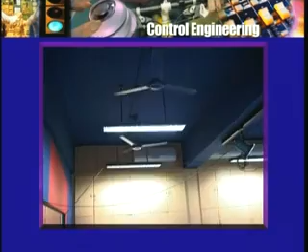If the incident light from the window is adequate, you may want the light off, but if it becomes cloudy, the light is not enough, and you will get up and turn the light on. Of course, one can have a much more sophisticated illumination system, as in a big lecture hall or theater, where it's not just one light to be turned on or off, but a large number of lights, some of which may have to be turned on depending on requirements. There is also provision for dimming of lights, gradually dimmed or made bright. This illumination control is a big area, but the simplest example is our ordinary light with a switch.

Of course, when you have lights that can be dimmed, the control is not simply on-off, and we'll see more of such things a little later. What else do you see in the room around you? Maybe above you, on the floor, or on the wall you see a fan—for example, the ceiling fan.

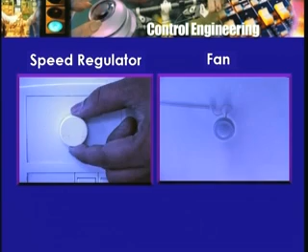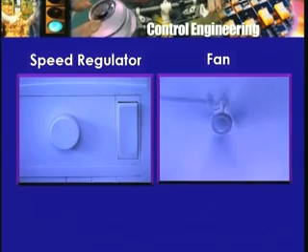Now that's also another control situation. If it's cool enough in the room, with fairly good breeze, you may not want the fan on, but if it gets hot, you will get up and turn the fan on. But there is something more possible with the fan usually—there is also an arrangement for controlling its speed, called the regulator, the fan regulator. Because you may not want the fan to run at only one particular speed, you may want to adjust the speed depending on conditions. Some people like to have the fan on at full speed; others, like me, are uncomfortable if the fan is on full speed. We like to run it at a low speed, just enough to produce some breeze and ventilation or circulation of air. So the fan has an on-off switch, of course—you are able to turn it on or off.

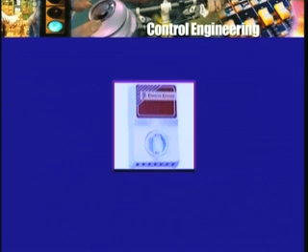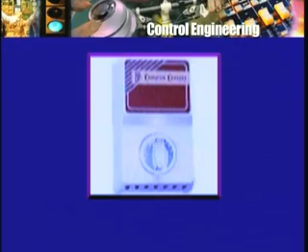Here the choice is not between just on and off, but between one of a number of levels or values. Such a set of values is said to be a discrete set. So this is an example of what could be called a discrete valued control situation. Here you choose not between just on and off, but between more than two possibilities, namely 0 speed, full speed, or speed in between 0 and full.

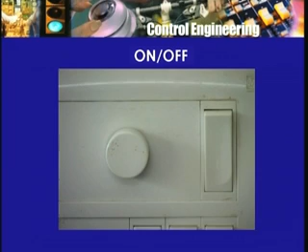Of course, nowadays we have regulators, fan regulators, in which the speed can be varied almost continuously. So this kind of control action is called a continuous type of control action. You have a knob and you can turn it smoothly from one position to the other, going all the way from almost standstill to full speed.

So besides the on-off control, which gives you only a choice between two values on and off, you may have a continuous type of control action in which on the face of it you can vary the speed in any way you like, or it may be discrete, where you can select the speed, or whatever other thing one is trying to vary, between a small number of values. So on-off control, discrete valued control, and finally continuous control.

Anything else in the room that you notice? We have looked at the illumination control, we have looked at the ceiling fan or the wall fan or the pedestal fan, and there what one controlled finally was the speed of the induction motor.

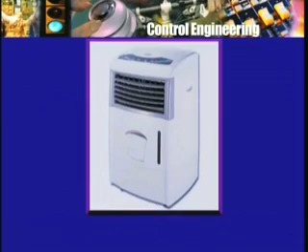Anything else that you see? Well, maybe you are seated in a room where there is an air conditioner, or very often it is just an air cooler. An air conditioner actually should condition the air, should control the humidity and the quality of air and so on. It should provide air coming from outside occasionally so that the air is refreshed. But usually what we have are only air coolers, although they are called air conditioners.

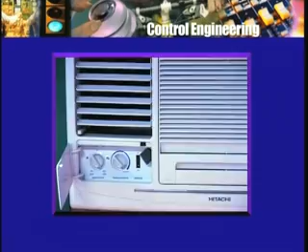Now here is another control situation. Of course, once again we have the on-off case. You may have the air conditioner switched off or you may have it on. But here you do something else. You set the temperature that you want. There is a knob or a control on the air conditioner panel, and you turn that knob so that it, or adjust it.

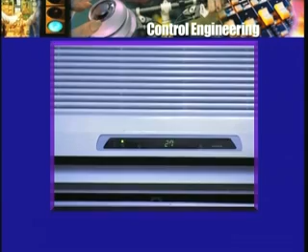Nowadays there are cordless control units for air conditioners. You point your cordless unit after setting it and the temperature gets adjusted. Now here again you can set the temperature to any one of a range of values, maybe going from 25 or 27 degrees Celsius down to maybe 17 or whatever.

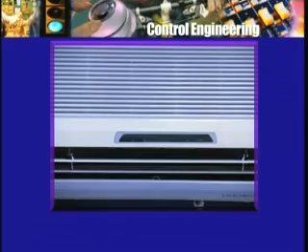Maybe too uncomfortable, but still whatever suits you. So there may be what looks like continuous control action possible. You set it between a range of values, but there is a difference between this control situation and the earlier one where you turned the fan on or the light on or off or adjusted the speed. And what is the difference?

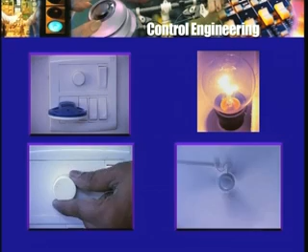The difference is as follows. In the case of the illumination control or the control of the fan, the control action was what can be called manual, in the sense you had to get up, turn the light on or turn it off, or had to turn the fan on or adjust its speed. So this is called manual control action.

And here is your first little exercise. I would like you to look up a good dictionary and find out how the word manual, M-A-N-U-A-L, originated. What is the root of this word? As you know, many English words have arisen from either Latin or Greek or other European languages which are older or related to English, like German or Dutch or French and so on. So find out the origin of the word manual.

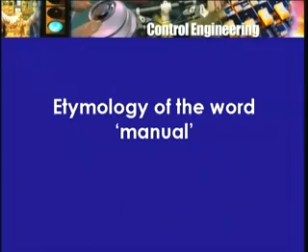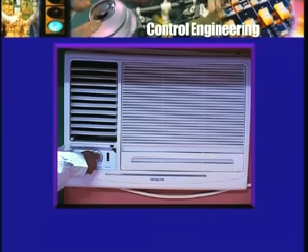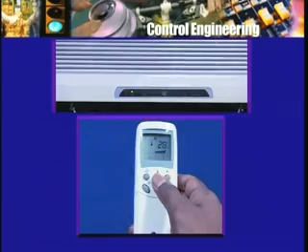So that's manual control. In the case of the air conditioner, of course, the control was partly manual because you had to set the temperature. You had to set the knob, or on the cordless unit you had to set the temperature by pressing some switch or a button. But thereafter you don't have to do anything.

What happens is that as time passes, let's say it's getting hotter and hotter outside, the temperature in the room, if the air conditioner is working properly, will remain nearly constant at the value that you have set. You don't have to get up and change the setting or make it cooler or hotter, unless you change your mind. You want to change it, then of course you can change it. So the control action here is partly automatic, or in fact the main control action is automatic once you have initially set the control system.

And there is a major class of control systems or control situations which are like this, which are often called regulator type control systems, in which things will happen automatically after the regulator has been set, and the value at which you are setting it in chemical engineering literature is known as the set point.

So the set point in a regulator system could be a temperature, it could be pressure, it could be voltage—it could be any one of the various physical quantities which engineers need to control.

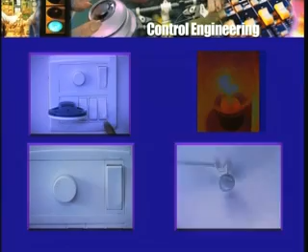But if you look at your house and see what control systems you might find there, besides the ones we've already seen—light, fans, almost every modern house in the city will have these—windows and doors, maybe air conditioners. In some places you may have room heaters, where it can get very cold.

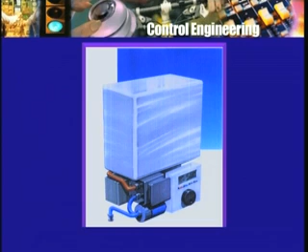Again, you may have a room heater of the automatic type, so that you set the temperature and the room heater will turn on when the temperature outside becomes low, and turn off when the temperature is rising. So the temperature control provided by a room heater may be automatic.

What else? Well, in almost every house in the city where we are fortunate in having water supply, which many of us just waste, in the bathroom or toilet there is a storage tank which we use for flushing the toilet.

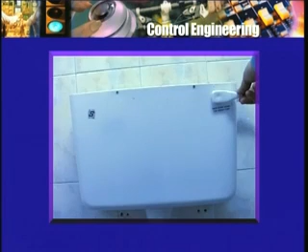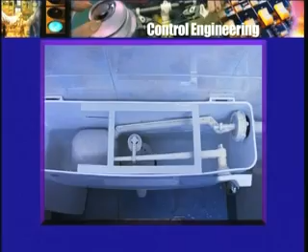Now this is an example of a control situation which is very old, namely a tank of water which gets filled without somebody controlling the valve or the pipe through which the water is coming. The water will shut off automatically.

So when needed, you pull the chain or press the knob and the tank is completely emptied. We flush the toilet and then the tank gets filled, and you don't have to keep standing there to close the valve after the tank is full. Automatically the tank water supply will get switched off or shut off when the tank is full.

As an engineer, you should take a look at this control system in a little detail. You should open up the flush tank and see what kind of mechanism you find there. Some of you are probably already familiar with it.

The idea is that the water in the tank should be at a definite level, because it will be below the overflow level—you don't want water to overflow. On the other hand, you don't want too little water. So when the tank is emptied, water will start pouring in, the water level will rise, and when it reaches a particular mark, you want the water flow to be stopped.

So there is an arrangement called a float valve—that is, a valve that is controlled by a simple thing that keeps on floating. It's usually a spherical ball or bob of copper, a hollow ball connected with a lever to a valve, something as crude as that.

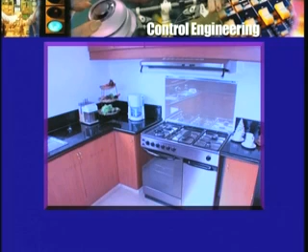For example, take a cooking gas stove. Once again, you not only have it turned on and off, but you have several positions possible, from simmer, that is low heat, to high heat. So again, there is a knob that you turn which does something, some valve opening somewhere gets changed, and you can have the amount of heat that you want.

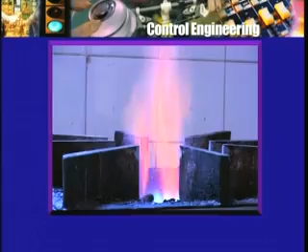You may have an oven in the kitchen where you will set the temperature. You want to bake something, or you want to make a toast your bread. You may want to set a particular temperature, and then again automatically some action will take place.

Or it could be a microwave heater, or a microwave oven, or a microwave range as it is called, where once again one may set not only temperature, but one also sets the time for which you want the action to take place. You may want the microwave range to be on for 1 minute, or 2 minutes, or 10 minutes. You may want it at full power or at reduced power, and so on.

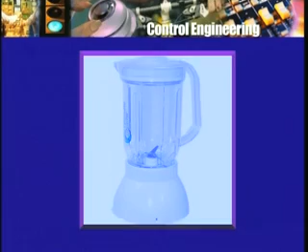Then there are other devices which involve electric motors. For example, you have mixers, blenders, things of that kind, juicers, where electric motors are being used and their speed is being controlled. Once again, usually it's not just on off, but for a mixer or a blender you may have a number of values. So discrete action, usually various positions called chop, blend, liquefy, and whatnot.

So we have gone around the house looking for control situations and found quite a few of them. Let's go outside now and see what are the situations where one can exert some control.

Well, you have a bicycle perhaps, and you ride a bicycle. You climb onto it, pedal it, get down from it. There is a lot of control action that is being used in such a simple thing.

Perhaps what are the most important parts of bicycle riding? I have been riding a bicycle for a long time now, so I know it. Some of you may not have learnt it.

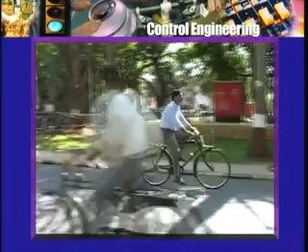Perhaps the most important is the act of balancing, not falling off. The bicycle tips to one side. So balancing is one act. If you think about it, it's not really very simple, but we learn to do it.

Then the other thing is steering. You want to go somewhere, you have to use the handle. You take a turn to the left or a turn to the right, and just a little push on one handlebar or the other handlebar, and the job is done.

Here is a control situation. Of course, this control situation is fully manual. You are there on the saddle and you are turning the handlebar, or you are pedaling. Then of course there are the brakes. A situation may call for the use of the brakes.

So even an ordinary bicycle is an example of a fairly complex control system, and of course it is a manual control system, and the human being, you or I, who ride the bicycle, that is the most complicated part of the control system. What exactly goes on in our brain, how we move our foot or hand, it's quite a complex phenomenon. Somehow we are able to do it most of the time.

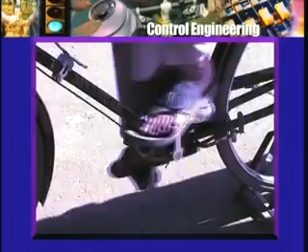Of course, instead of pedaling now, you have something else, either on the handlebar, the grip bar, or a foot operated accelerator pedal, which will be used to increase or decrease the speed. Again, there will be brakes on the handlebar or a foot operated brake for slowing down the vehicle. So a similar situation: control of speed of the vehicle, control of direction with steering.

Once again, when you are riding the scooter or motorbike, a very complex system is operating along with the motorbike. Compared to the motorbike, you are a much more complex system. Compared to you, the motorbike, although it looks very complex, is not really that complex a system.

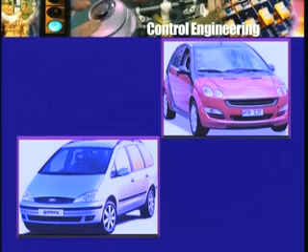Of course, you can go one step further and graduate to a motor car. Here the balancing problem is over because it's a four-wheeler. You don't have to do the balancing act anymore, but you still have speed control with the accelerator pedal, and you have to brake the vehicle with the brake pedal. In addition, you may have more things like changing the gear, for a car which has a gear change mechanism and is not an automatic transmission car.

And there is steering, of course. You have to follow the road and steer the vehicle to the left or to the right. Again, a manually operated, or manual, control system.

But these days people do talk of more sophisticated automobiles where, for example, the steering column is not directly linked with the wheels, the front wheels, which determine the direction in which the car will go. And in the aircraft situation, there is so-called fly-by-wire, that is, there is no direct mechanical connection between what the pilot operates and what the effect is. Similarly, the braking arrangement could be through power brakes, power steering is what the earlier one is called, and so on.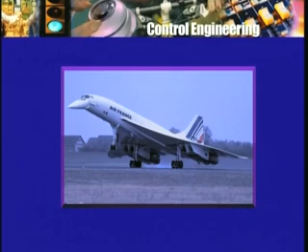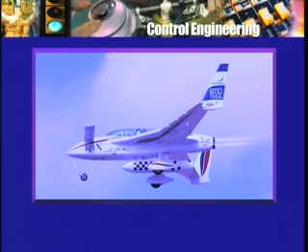Of course, if possible, one can move further up and fly an aircraft, and there are control problems there, a control situation there. The most difficult, perhaps, and the most exciting parts will be the takeoff and the landing, and comparatively easier will be maintaining cruising at a particular speed and at a particular height. And if the weather is fine and there is no turbulence, then there is very little work to do.

In the aircraft situation, one does talk about things like autopilots, thinking that the human pilot could be replaced so the whole thing could be made automatic. People have thought of, and there are situations where you have automatic landing, automatic takeoff, and automatic cruising also. So the whole pilotless aircraft is an example where there is no human being; the whole control is automatic. So there is a whole range of control situations or control activities.

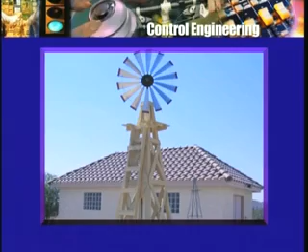One can look at other places, one can look at industries, think of what goes on, and you will see that there are control situations everywhere. At an earlier time, windmills were used for grinding flour maybe, and there was a control situation there. You may want to adjust the speed at which the grain is being ground, whereas the wind speed is not under your control. So some arrangement has to be provided so that the speed of grinding can be changed.

There were water mills. The mill was operated by flowing water in a stream, and again there would be similar problems. You may want the water mill to operate at a particular speed, whereas the flow of water may be too slow or too fast. So something has to be done to achieve this constant speed of operation. This, as I referred to earlier, is a regulator type of operation.

In a modern situation, let's say one looks at an electric generating station, you'll see there are plenty of control actions taking place. What are the various kinds of generating stations that you know of? Although you may not all be electrical engineers, today we need to know a little bit at least of electric power generation and its use. So basically, what do you have? You have some mechanical device called a prime mover, which moves the generator, which generates electricity, as you might call it.

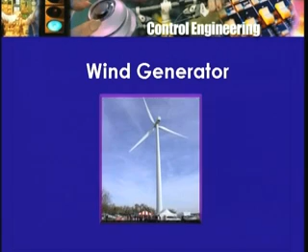There are in our country now commercial wind generating stations where the generator is connected to the windmill, and so it's the wind which propels or moves the generator. There, as I mentioned earlier, there is a control situation because the wind speed can vary, the wind direction can vary, and you would like, once again, if possible, to maintain the speed, frequency and voltage constant.

Because there are problems, one may do it a little differently. One may want to generate a DC voltage and use storage batteries rather than generate AC voltage of a constant frequency and voltage value. One may of course use photovoltaic cells.

You may have seen some of these photovoltaic panels in many places. The photovoltaic cell will produce electrical power. As the day proceeds from morning to evening, you may have to move the array of cells to follow the sun so that the maximum amount of radiation or heat falls on the cells and the cells produce the maximum amount of energy possible.

So here again there is a control problem of moving the solar panel to follow the sun. Of course, if the sun gets obscured by clouds, then what to do? That's an additional complication in the situation. So electric power generation really involves a lot of control situations and control problems.

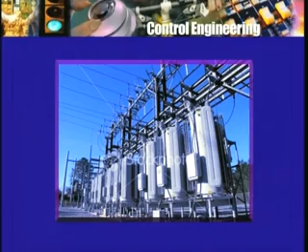In production industry, in mechanical industry, for example, one can go to a workshop and see a lot of things in action which involve control. For example, in machining, one will operate lathes, milling machines, drilling machines, shapers, all kinds of machining devices, which are nowadays operated by electric motors. So there again there is a similar problem of controlling the speed of the motor, of controlling the power that is produced by the motor, so that the proper mechanical machining action takes place.

One talks about numerically controlled machine tools. You must have heard of numerically controlled machine tools.

In chemical process industry, again, there are control situations almost everywhere, right from the place where the oil exploration or drilling has taken place, the oil wells, the oil has to be pumped up, brought to the surface, and then sent through pipeline. Then at the refinery, a lot of chemical processes have to be done on the crude.

There is distillation, so there is heat production. I did not talk about this earlier, although I did talk about the microwave oven or microwave range, where the amount of heat is to be controlled. So ovens are an example where the amount of heat that is to be produced, or the rate at which heat is being produced, and the time has to be controlled.

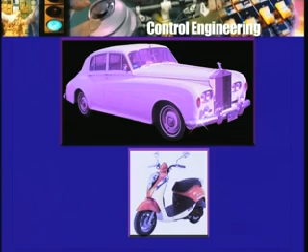So you see that control systems are to be found in almost every walk of life, right in the room where you are seated, in your house, in devices which give you mobility, the bicycle, the scooter, the motor car, the aeroplane, maybe the spaceship or rocket which takes you to the moon and brings you back, or the rocket which sends a spacecraft to Mars and lands it there, to industrial situations where power is being produced in generating stations, power is being used in workshops, in factories, in refineries. There are control situations almost everywhere.

What is common to all these situations? Looking at it from a very simple point of view, what is control?

All that I have been telling you are examples of control action, but what is common to all of them? Well, if you think a little bit, perhaps you will agree with me that what is common in almost all these cases is that there is a choice. You can either do this or you can do that, you can select this or that or something else. There is a choice. If there is no choice, there is no control.

Things are out of control if you can't do anything about it. Let's say the power supply has gone off, or there is a power shutdown, and if I don't have any standby electric system or whatever, then that's it. No control over the situation. The lecture is cancelled or the movie show is off. No control. So control is where there is choice.

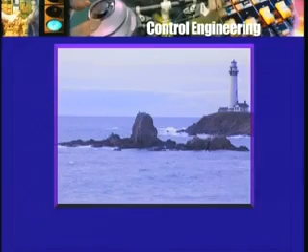You have heard of lighthouses. These are small islands or rocks, rocky portions jutting out from the sea, and they constitute a risk for shipping. Of course, this is 100 years ago, so there was no radar, so one could not detect such things from a distance by using radar. You depended only on sight. The captain would be on the lookout, or somebody standing much higher, maybe on the mast, would be on the lookout for such things. And then you have to steer clear of these obstacles.

So lighthouses, they are quite old in human civilization. Those of us who are living only on land, we are not bothered by lighthouses, but communities such as Norway and Sweden, which have a very long shoreline, which have depended on fishing and shipping and so on, for them it has been very important.

And the shores are very rocky in that part of the country. So think of a lighthouse. What is a lighthouse? Lighthouse is essentially some kind of a tower which is built on that rocky portion or small island, and on top of the tower you have a beacon, you have a light. Now there is a problem here, because that light has to be kept on, especially at night, when ships would be able to then see it from a distance and steer clear of the rock.

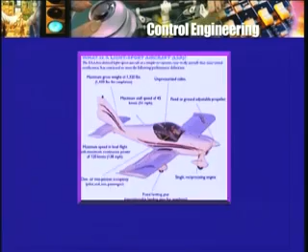Human beings are liable to make errors of judgment. One gets tired. Pilots, if they are piloting an aircraft continuously for many hours, you can imagine how tiring it must be. Think of ordinary truck drivers, locomotive drivers, or yourself on a trip, maybe a one hour ride or a three hour ride. Driving yourself is not exactly enjoyable, whereas an automatic device may be more reliable.

So where reliability is very important, where you want something to operate and you want to be sure that it will operate, you may want to make something automatic. Although if you have a person there, it will give him a job, it's all right, but maybe it's too risky. You can't take the risk.

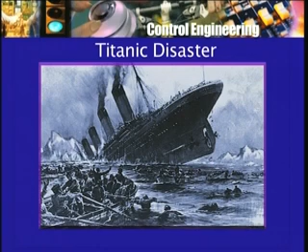You can't say, all right, what happened is I just dozed off and the ship hits the rock and people are killed and drowned, a Titanic-like disaster. If it is because of the lapse by one person, it is something certainly one would not like to happen. So this is one reason why human beings very often are replaced by machines.

Are machines always reliable? Well, yes and no, because machines can also go wrong. Machines can also fail, so they need to be properly maintained. You need to look at the power supply, whether it is reliable, things like that. So it's not that just you have a machine and it becomes reliable. There is this additional problem of keeping the machine operating reliably. But at least the human being's problem has been removed.

Is there any other reason why one would like to use automatic devices rather than human beings? Well, the accuracy that is possible with automatic devices is much greater than perhaps the accuracy with which human beings can control a situation. So where you want more accuracy, more precision, finer control, it may be necessary to replace a human being by an automatic device.

Suppose the temperature has to be adjusted or controlled, an operator may be able to keep it within plus minus 1 degree Celsius or maybe plus minus 0.1 degree Celsius. He has to read on the dial what the temperature is and make that adjustment, and as it happens, think of a situation where the adjustment has to be made continuously. You can overshoot the mark, it's too much, then you reduce it, it's too little, and go on playing like this.

Because of the way we are, we can control ourselves. Of course we do ride bicycles, drive motor cars, steer them and whatnot, but still the precision is limited. So where things have to be done more precisely, you have to put in an automatic device. If something has to be kept within, say, 1/100th of a degree Celsius or 1/1000th, or voltages or frequencies have to be maintained within 0.1% or even less error, there may be no option. You can't have a human being sitting there twiddling a knob and setting it to see that it is at the right value. The human being is not just adequate in many of these situations.

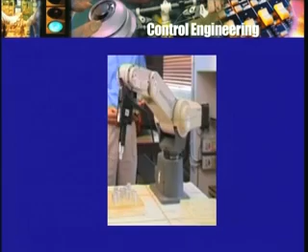There is one more very familiar situation now, or at least one hears about it. One hears a lot about so-called robots. One talks about robots, one even has robot toys, a robot that will walk, or a robot that will pick up something from one place and put it down in another place. We are told that there are automobiles which are assembled using robots and whatnot.

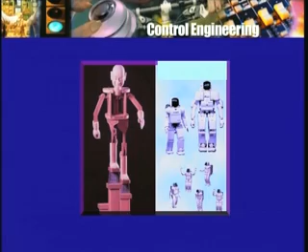Why does one want to have robots? Now, there may be similar reasons. For example, manpower is expensive. That could be a reason why you replace a human being, an operator, by a robot. Or the kind of precision that is required, a human being cannot provide. A human being gets tired, fatigued, doing the same job for hours together. The human being is liable to make errors of judgment arising out of fatigue and things like that. So you may get a better car if it is assembled by a robot rather than by a line of factory workers working on a conveyor belt kind of situation.

Of course, it's fun to have robots which can do things for you. I sit here and I want a glass of water, so I have a robot, I command it, fetch me a glass of water, and the robot goes to the table and gets me water. I am lazy, I don't want to get up and pick up my glass of water. If I have a robot at my command, it will be nice. So this is just a humorous example, but you have seen situations in movies where you have these automatic devices doing things which human beings would do earlier.

But robots are important, industrially they are important. In atomic power stations, for example, or atomic research laboratories, where things are very risky for human beings to operate or handle. For example, one thinks obviously of uranium samples, radioactive material which cannot be directly handled. So one may want to handle it indirectly with the help of robots. So robotics has seen a lot of development in recent times, and it's a very major area of control system activity.

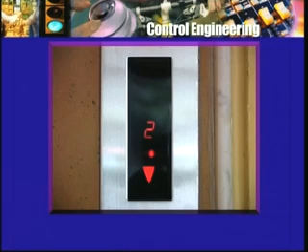You are on the ground floor and want to go to the 10th floor. The lift is somewhere else, so you press the button. It comes down to the ground floor level. Maybe the door opens automatically or has to be opened manually, so again there could be a manual or automatic action. Then you get into the lift cage and press a button for the appropriate floor.

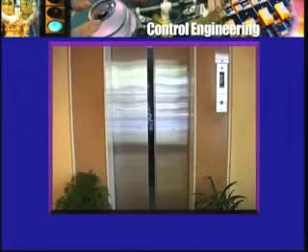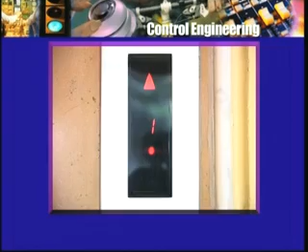So the action is sort of discrete. You go from 0th floor to 10th floor, get off, then somebody calls it to some other floor and it goes there. The control action consists of a sequence of actions: lift goes from 0 to 10th floor, maybe 10th to 6th, then 6th to 2nd, governed by people pressing buttons who want to use the lift.

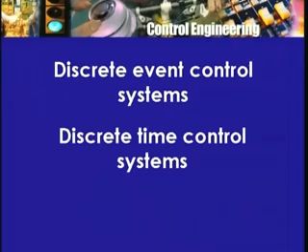This, by and large, is referred to as a discrete event or discrete time control system, where the action does not take place all the time. For example, the lift may simply be at the ground floor because nobody is operating it, nobody wants to go up or come down, so there is no action. It's only when something is to be done that the lift comes into action, moving up or down. This is an example of a discrete time control system.

Whereas there are continuous systems operating continuously all the time. Think of the thermostat regulation of temperature in a room with an air conditioner. You can't have the thermostat operating for 5 minutes and then not operating for 15 minutes doing whatever it wants; you want it in operation all the time. As people come in, the room becomes warmer, so the thermostat produces more cool air; if people go out, it should not suddenly become chilly, so the cool air circulated is reduced. This is an example of a continuous time system where action takes place all the time.

Many industrial examples are of continuous time, although there are discrete time systems also. Machining operations, for example, can be of the discrete type, where certain actions are to be done in a particular sequence.

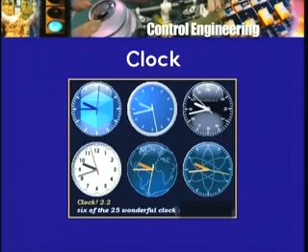In a way, a digital computer is an example of a discrete time control system. What produces the discrete time in the computer? There is a device called a clock. This clock and the pulses it produces are the discrete time keeper of the operation of the computer, and things take place at discrete instants of time. Of course voltages and currents are changing all the time, but what matters is what is happening at discrete moments of time.

At one clock pulse this is what is happening, at the next clock pulse this is what is happening, and so on. In the old-fashioned block diagram of the computer there is what is called a control unit, which determines the sequence in which operations take place. So there is a control unit inside a computer also, and the computer can be looked upon as a discrete time control system.

It can also be regarded as a discrete level control system, because almost everything in the computer - look at a transistor, or a memory cell - is either on or off, plus or minus, yes or no, 1 or 0. So it's a discrete level, discrete time, or discrete event control system.

This is another important classification of control systems: discrete time versus continuous time. An earlier one I mentioned was discrete level versus continuous level, and one more I've been talking about is manual versus automatic. So you can have a variety of combinations of control systems. We'll look at some more aspects before we take specific examples from a more detailed and mathematical point of view.